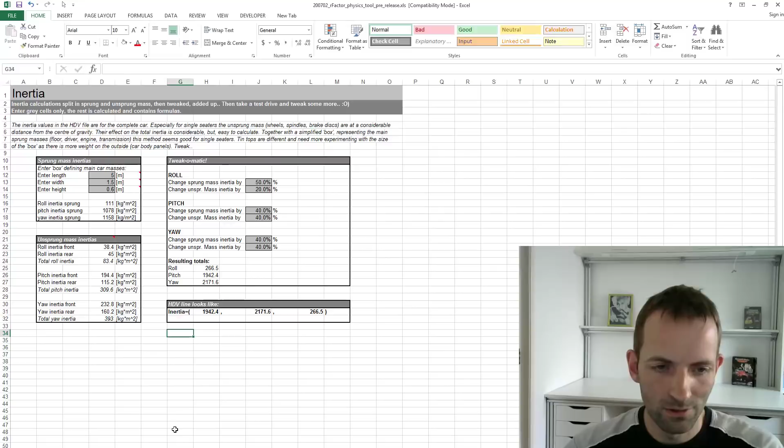Same for the springs and the dampers. There's lots of numbers here, things I could enter, the spring stiffness and lots of tweaks and stuff. It calculates a lot of stuff. I can adjust a lot of stuff, like the adjustability in the car setup menu in the game, how many steps you have to adjust something. And then at the end, these numbers, they come out, which are again part of this physics file.

This is not much. There is some tire curve stuff here, but it's all very, very limited and not yet doing a lot. So this was my first, always being clever, my first spreadsheet that I made, more or less. And it sort of got the ball rolling because I felt at this point that this was the right track to be on in order to make more realistic physics, while not just chasing like a needle in a haystack, but actually being in control of the numbers by making the calculations in the spreadsheet and then spitting out the lines that go into the text files. Pretty clever, I thought back then, but there is more.

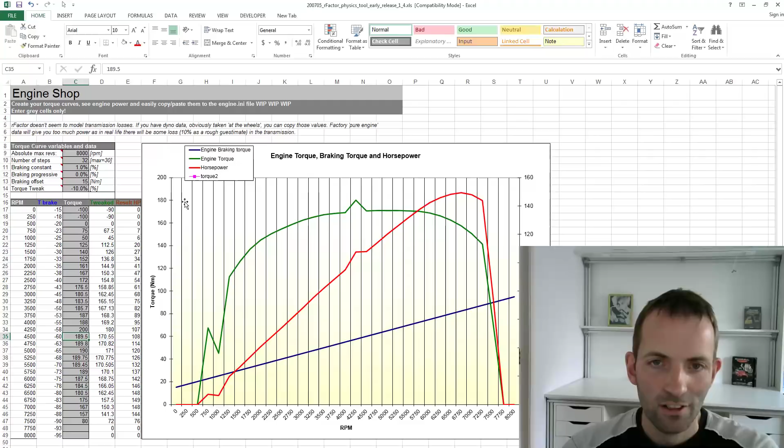Overall torque tweaking, like for drivetrain losses and stuff. And I just had to enter one torque curve. So here, you see, I'm making the curve, well, destroying it now. But see, you can make your shape here, and then at the bottom, this will be able to be copy pasted. Let's see if that works. It should work. Copy, and then paste. There's actually a bracket missing, but I didn't select enough cells. But that's how I would import this engine into the game.

So a continuation of that first spreadsheet with more and more stuff. Gearbox added. How many gears do you have? And also the speed you'd like to hit the rev limiter at. So that's a very logical way to set a gearbox, isn't it? Just specify the speed you'd like to do, the shift points basically, and it will create the gear ratios for you. Again, these lines here. Copy paste into the gearbox file and copy these into your HDV file.

And normally if you have to make a gearbox, it depends on the tire size and the revs of the engine, what sort of gearbox you need. So it's quite difficult to predict what gear ratio will result in 100 kilometers an hour top speed in first gear. So why not use a spreadsheet to just calculate it for you? And that was quite handy, and you can imagine the time it saves on making a car. So that's quite nice.

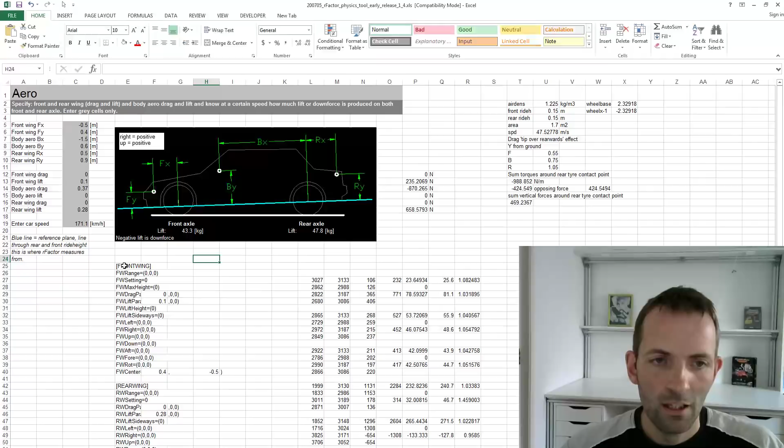Still no tires. I struggled with that. There's a bit of tire curves, but there's not a lot there. There's a bit of aero as well in this sheet, calculating some wings and stuff. So I would enter a car speed and I will get my aerodynamic forces there. And again, a whole bunch of aero parameters that go into the HDV physics file. So you can already see it's starting to expand, and it's starting to make more and more bits of the physics files. It's nice to see this after 12 years, and perhaps it's interesting to you to see how this slowly progressed from modding into the more professional stuff.

So if we continue, here we have a different color scheme, which is obviously very important. We're now somewhere in the summer of 2007. This is more of a total creator of tires. So you can make stuff here. So let's make some tires, if I remember, for a Corvette. I don't know, it's copies there, yeah, to high performance, track day, grip tweak. Well, we don't know if we have to tweak yet.

So these are all the numbers you have to enter. And then there's this magic button. And then we create a new text file and paste. There is my entire tire file. Ooh. With the numbers we entered. The road tire generator O-matic. Yes, I read the Hitchhiker's Guide to the Galaxy where everything is an O-matic.

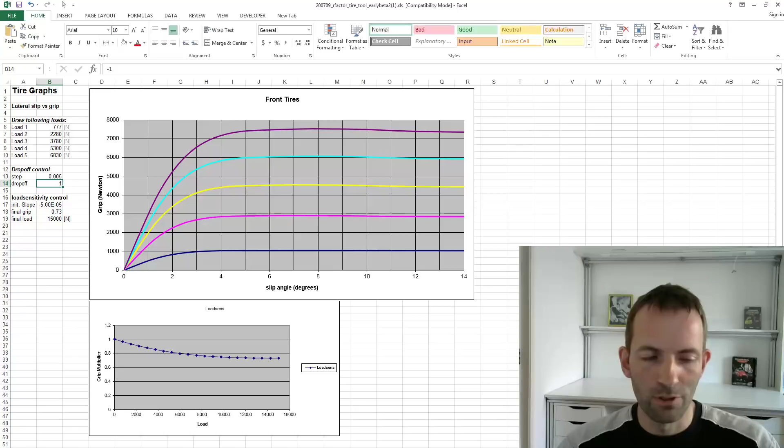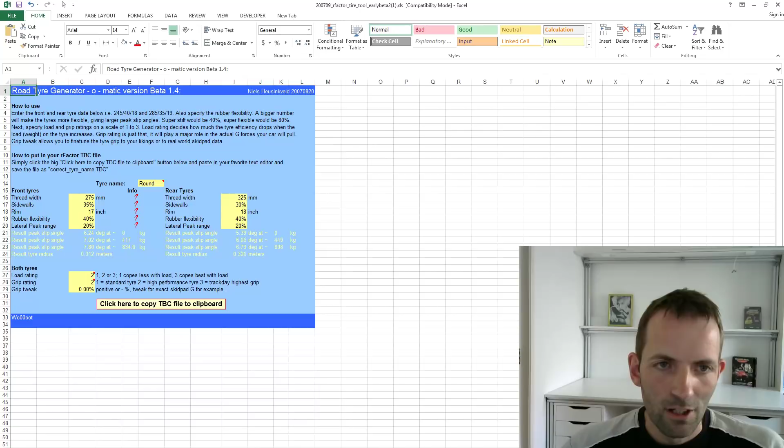So by this time it's getting a little bit more complex, and it's taking more random work and more boring work away. And I can focus more time on creating tires by changing the parameters rather than changing all those numbers. So that's another nice step up. And this was the time when we released the Corvette C6 mod for rFactor. If you're very old, you might know that.

So this is so old. This is my student apartment. 11.6 square meters back in 2007. Very cheap though. I got no debt as a student because my room was cheap. No 4K back here even. It's all very old school.

Actually a prototype H-pattern shifter. So guess how long the prototypes of that thing have been in the works. rFactor single screen. Over the shoulder cam. Potato camera. 320 by 200 I think. And this was the first result of some of these physics tools.

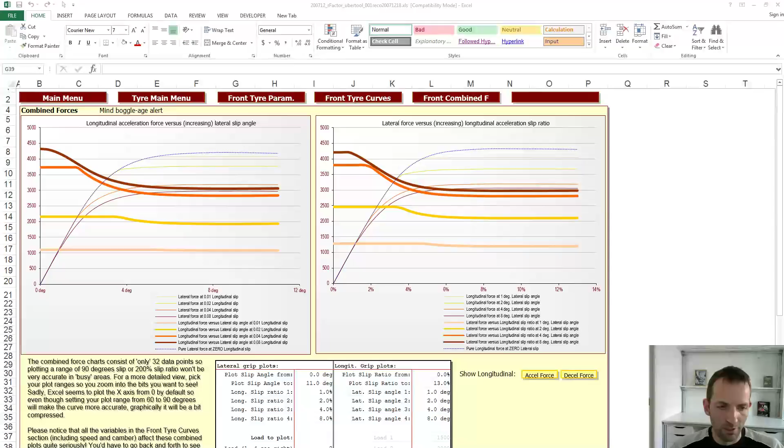Well, all these snippets that you saw here, one file created, it still was a bit scattered, right? So it would be nice, we are another few months later, to have a more complete tool. And I started working on this late 2007. Another change of color scheme. It still was the plan to go public, although I had no control over what I was doing. It was sort of getting out of control a little bit. Lots of buttons, most of which probably some work.

So here I set a lot of parameters and get some numbers, and it's gradually becoming more complicated. But it's also like, yeah, lots and lots of numbers. So this didn't happen overnight. This was a year or so worth of combining knowledge and messing about.

And for example, the tire curves are now easy to make. So I have here show curve. There are 8 curves, I believe. So curve 1 is this line there. And if you would like to make a new curve, I could just make a curve. So let's say this is a nice curve. I could save it as 5. Whoopsie. And then make a different curve.

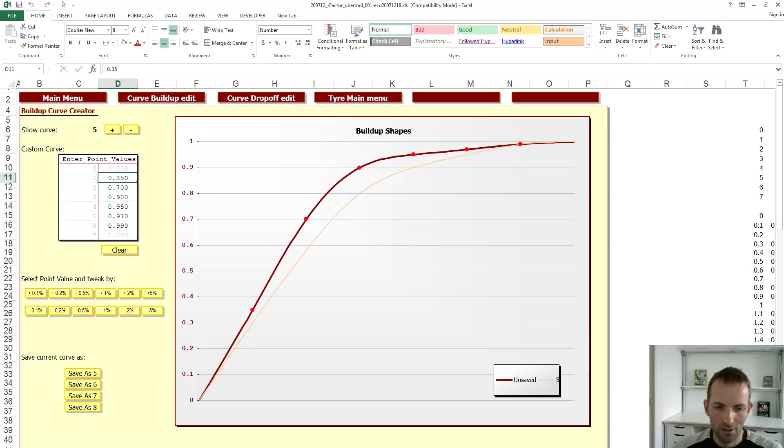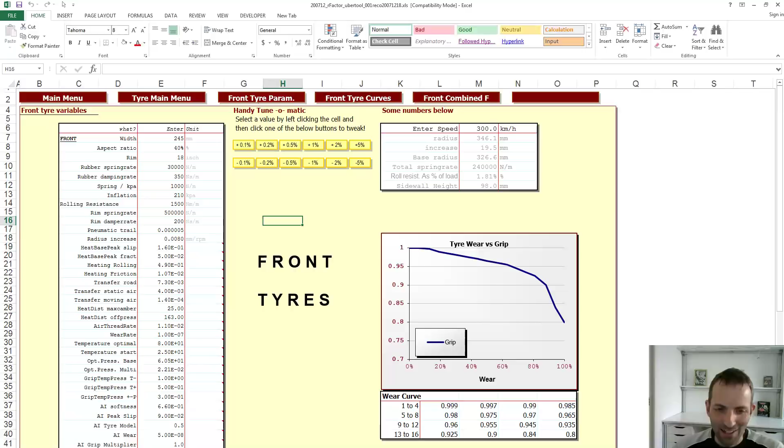This, save as 6. And now if I show curve 5 and 6, whoa, these are the ones I just created. And I can then apply these curves if I wish to, I think, here. I assume that somewhere, I haven't used this for 12 years, right? Somewhere I can set which of these curves I'd like to use in the tires. I've just got no idea where, but hey.

Oh, front tire curves, yeah. Here, front tire curve, build-up shape. 3, 4, 5. This is the one we just created. So I can change the slip curves of the tire, enter all sorts of parameters, see all sorts of plots of what's going on. So this is quite another step forward in realism and trying to get a view of the physics.

I mean, this tells you something, well, probably doesn't tell you a lot, and secretly it didn't tell me that much either, but compare that to this. This doesn't tell you anything. It's just numbers, and that's very hard to see. But this, you can, oh, right, I can see some grip increase and drop and some stretching, shrinkage, camber stuff. It being more graphical and easier to look at and see your changes, not just in numbers but in a curve shape, it's just so much easier to work with.

So this is another very big step, although it still doesn't make complete files because I think I got bored or sidetracked, probably sidetracked. Because what happened by then, after the Corvette, I got in touch with the Historx mod guys, if you remember. Lots of historic touring cars from the 60s and 70s. Awesome mod, if you ask me, sort of GT Legends, if you know that game, those cars. And I got involved with them.

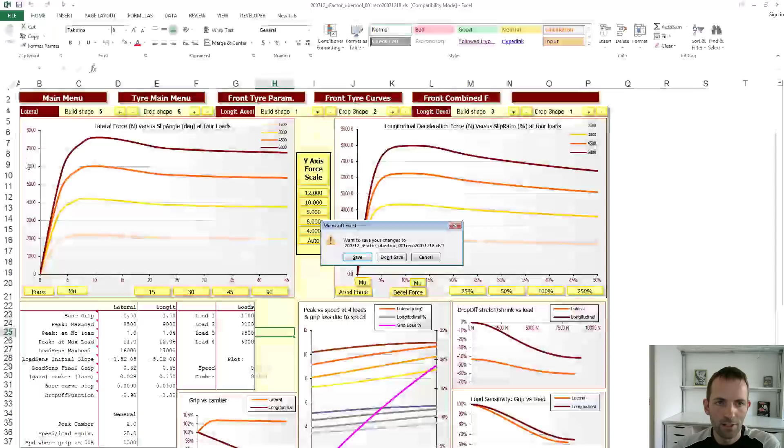So the whole thing with the physics stuff is there are so many parameters, and just changing them one by one is silly. And how about doing that for 5, 6, 7, 8, 9 cars? That's just 9 times as stupid. If you have a physics tool that makes 1 car, sure, that's nice, but then you have to make 9 cars. That's still a lot of work, and it's very hard to see what you're doing, like having that overview of what have I done to each car, what are the rules for the tire grip, stuff like that.

And with this tool, this is actually the TREX that you may have seen in some videos or earlier stuff, it makes multiple cars from the same spreadsheet. The basic theory here is that I don't create tires for each car so much as that I have rules somewhere.

Well, sort of, tire bits. It's all a bit small fonty, but heat and wear stuff is here. Tire curves, that's pretty much the same. So you can make subtle changes in tire curves, you can save them, do some checks on the curvature shape.

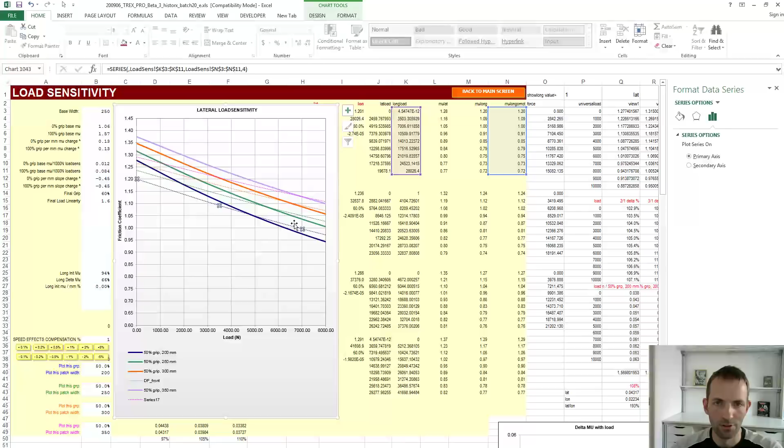Right, so here are 4 tires, 50% grip, which is just a subjective thing, and a few different ones, so a narrow tire to a very wide tire. And here you can see the grip versus load curve of the widest tire and then the narrowest tire, and the dotted lines are longitudinal. This is quite important because these rules that I've set here determine what happens when the tire deviates from its base width - it changes the grip and the load sensitivity. So rather than changing each tire individually, I have these rules that create all sorts of tires. This is quite simple, of course, but it's easy to tweak and very logical.

So in the main input, where a lot of stuff happens, I have this - the width of the tire, the contact patch width, the rolling resistance modifier, tire aspect ratio, that sort of stuff. So just the width of the tire looks at all these numbers and creates the load sensitivity. That's quite easy to do.

And I can look at some of the performance curves, like the cornering stiffness, the load sensitivity, lateral and longitudinal, how the slip angle changes, and I can do this for various cars, car 2. It doesn't really tell me what car this is. Corvette. So I can quickly look at what the properties of the tires are for each vehicle.

So this whole rule thing is very important here. Rather than doing all the parameters for each car, just set up some rules that look at a small number of parameters and then derive all the other parameters from it. That's quite important.

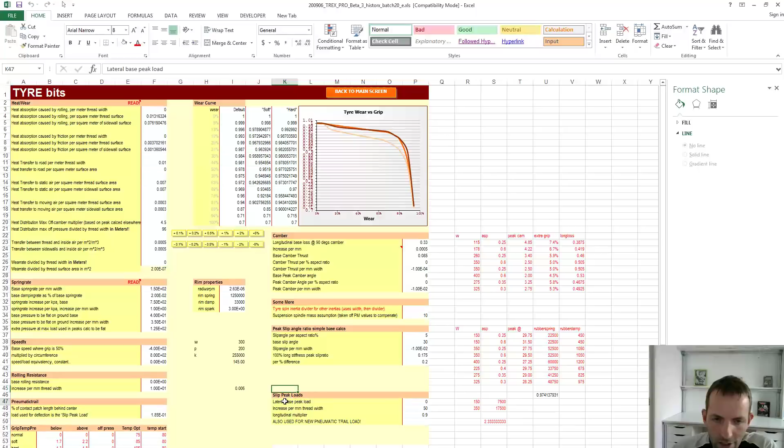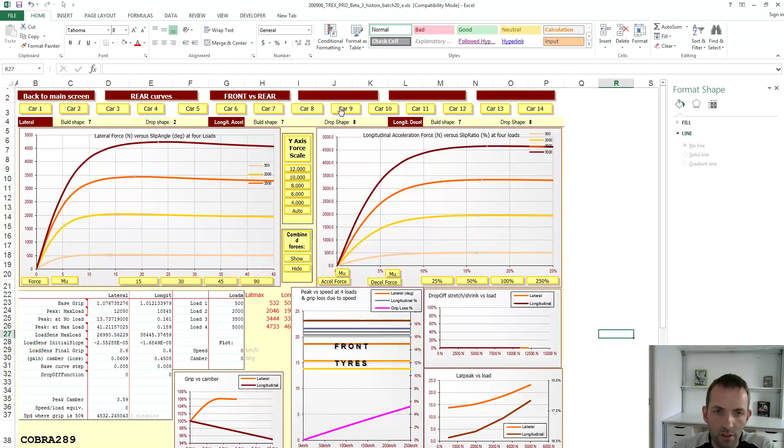So this is the Porsche 911S, and I can look at a different car. It's the Cobra 289, and then it has different tire curves. The Ferrari, whatever it is, the Healey, Austin, the Alpine, great car. So multiple cars in one sheet.

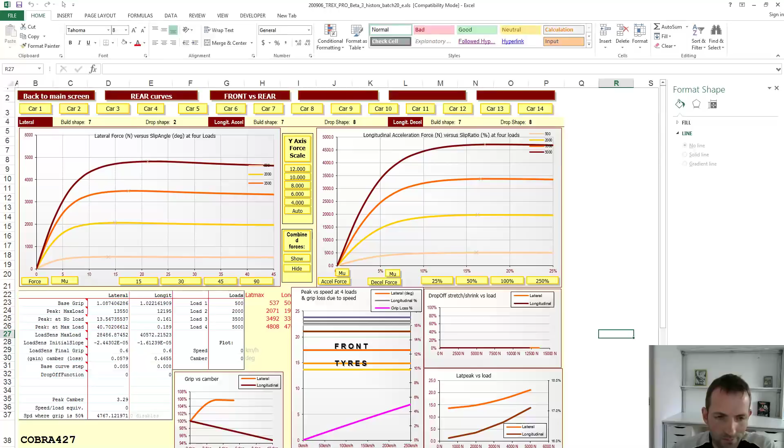Very nice, and it does add up to quite a lot of numbers. This is quite complicated in the sense that there's this many cars and main car bits, well, all the numbers - center of gravity, heights, dimensions, bug compensation. There was a bug in rFactor regarding inertias. Collision feelers, under tray, tire stuff, some calculations done on it.

So this is what it would look like if you change the grip parameter. You have the same tire width, but you change it between 0% all the way up to 100% grip, and you see how the load sensitivity changes, all from logic that I've applied here. Not only does this work, it can also save all the files with one click, which is neat to say the least.

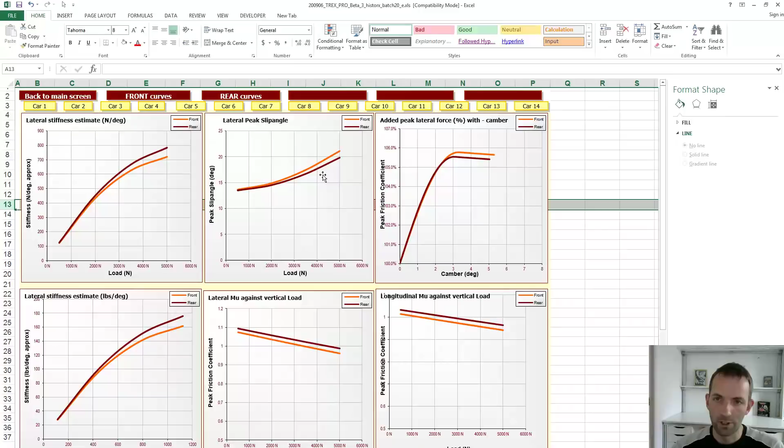There's a lot more actually here, if you keep scrolling down with the tires, the different curves we used. You could see we made some different shapes of curve, and I can set all those curves here, go to various sections, create my own drop-off curves, front curves, rear curves, front versus rear, important, main screen. You see that it navigates quite smoothly.

More variables, suspension, calculating the spring, the ride frequency. You enter the ride frequency and it will calculate the spring rate for you, and create dampers based on the critical damping. So there's a lot of stuff being automated, because how do I know what sort of dampers I would need for a certain car? It depends on the weight of the car, the stiffness of the springs, and by using a percentage of critical damping it's quite consistent. I just enter the percentage and it comes up with a damper that's 5,000 Newton per meter per second or something.

Something about the travel, bump travel, the alignment, aerodynamics, some simple aero, some calculations for the aero. And here's something I didn't quite understand that well at the time, how the ride height changes with the downforce. I don't think I understood it too well back then, and I certainly don't do that anymore now.

More aero, brakes, based on the g-force. That's quite nice, because I know reasonably well what the g-force will be that I want to pull on the brakes, but I don't know how much torque each brake disc will have to apply in order to get there. So by entering a g-force, which I know, it will calculate the required torque. That's another big time saver.

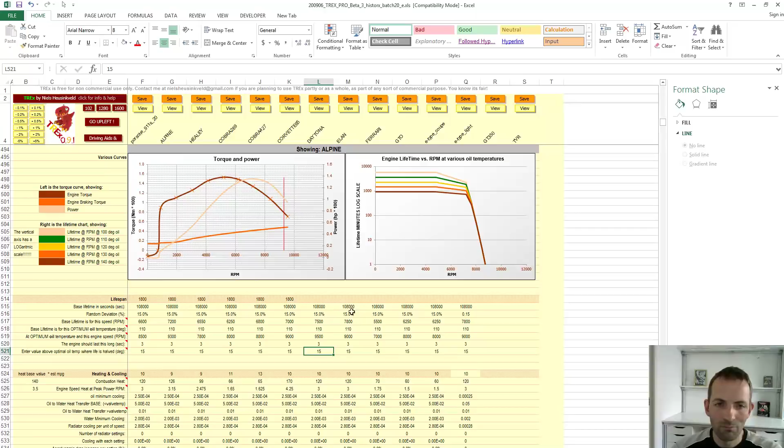Change the engine of all cars. The engine braking is also a constant number, the percentage of the peak torque, so that should be fairly consistent. Something about the engine lifetime calculations here, you can see exactly what revs the lifetime of the engine is 1 second, in other words you pretty much blow it instantly. All in overview for this group of cars.

That's quite nice. Drivetrain, of course, which wheels are driven, how strong is the clutch, and it looks at the engine for the torque it has to transmit. Adjustability of the differential. Gearbox, again a few different types, which is quite nice, so I can configure the gearboxes here. I have a couple of types, some curves with the speed the car does in the gear you're in, and based on that it will sort of spread out the gears in a certain way, gear ratios if you want to enter them and have them adjustable here.

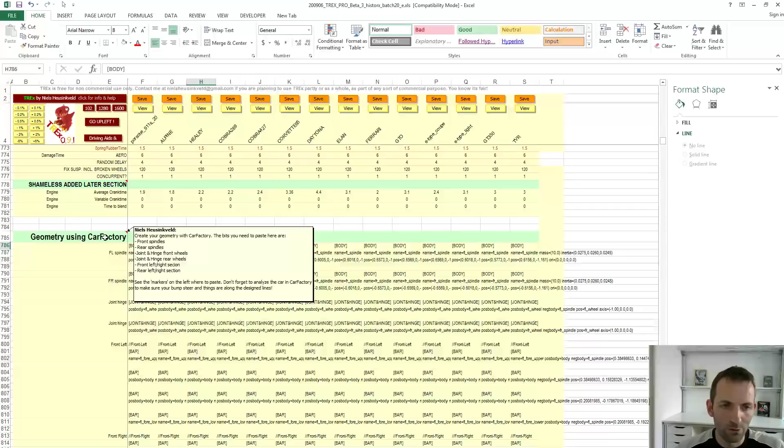AI stuff, pit menu stuff is sort of the leftover stuff, all the suspension stuff, which I used CarFactory for, already mentioned that, that's the tool made by Chris Hoyle. So everything is here, geez, quite a lot. And in the end, yada yada yada, tool rFactor XL, quite a clever, relatively clever thing.

Let's see, does it work? Let's save some of these files. I'm not sure if it's gonna work.

Yeah, okay, I just made this folder so it should exist. Now I hope - always a bit scary - can I press this button and will it work?

Yeah, so I saved the Porsche 911S and I've saved the Alpine. The date appears when I last saved it.

So this was the beginning, the very, very early beginning of Visual Basic as well. So this was all good and well. And by this time, Reiza Studios had also started more or less. So the Formula Armaroli mod that we did for rFactor and some of the first cars for Game Stock Car were made using this version of the tool.

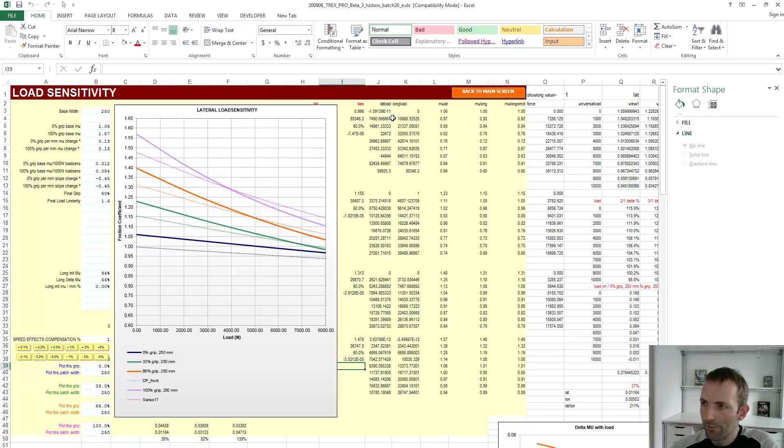Let's sidetrack a little bit now, going towards more professional stuff, because I did modding and Reiza Studios, but also some work for racing teams. And I've prepared a couple of these files where I removed all the sensitive bits, hopefully.

And this was at the time where everybody, if you're not a Formula 1 team, you used rFactor for your race simulator. So all the GP2, Formula 3 teams used rFactor, and some of them still probably do. Or Automobilista or rFactor 2, whatever it is now.

And I saw there was a market for making a tool for racing teams that would allow them to set up the car easily with numbers they knew and understood, and then launch a simulator and have a go. The thing that struck me was, with all these tools you've just seen, how complicated and how many numbers there are - there's just no way a race engineer at a GP2 team has the time, because by this time we're a year or two in, to understand all this stuff, even if he could, which he probably could.

But you cannot afford to spend a couple of years full-time working on the simulator because, unlike Formula 1 teams, all the Formula 3 GP2 teams have no money. They have money, but it's not like, oh yeah, let's hire some extra guys for a simulator. That's very rare. So I figured let's make a tool where these teams can use their car more or less in the simulator.

So what would happen? I would create the base car for them - in this case it was for a GP2 team. They give me all the data, I sign all the NDAs and stuff, and everything you see here is fictional. I've changed all the numbers, this has nothing to do with the real thing. This was also 2010, so a very old GP2 car. They gave me all the data with which I created sort of a base car, and then I gave them this tool, which allowed them to set up the car in the way they were used to.

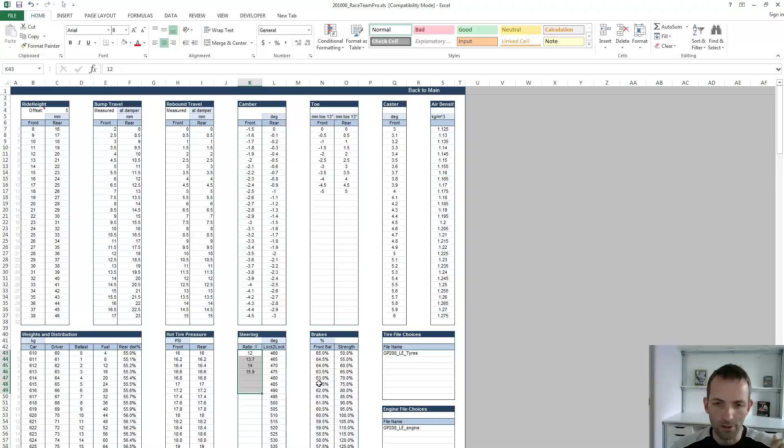So lots of stuff they can select for the travel and the weights and steering ratios, everything like that is adjustable here. There's a thing with rolling radius, complicated ways to make it more realistic. Aero as well, very important on racing cars, of course. And here I would have all the data from the wind tunnel, from Dallara in most cases if it was a single seater. Again, this is not a Dallara aero map, I randomized it.

So this would be the place where you would enter the actual Dallara or whatever your manufacturer was, all the tables of rear ride height, front ride height, total downforce, aero balance and drag. This would come straight from the car manual or a spreadsheet that you get from the manufacturer. You would put that in here, and there would be space to have lots of them, like a low, mid and high downforce. And then here at the aero tab, there are some things you can do.

Apply certain, I don't know, wing settings, 40, 60, and you see things change, drag. And these wing settings and the drag settings will change the aero parameters that will be saved to the physics files later. And here you can compare it. So this is one of those maps from the real data. This isn't, like I've been repeating myself many times, just random data here. So here you would compare that.

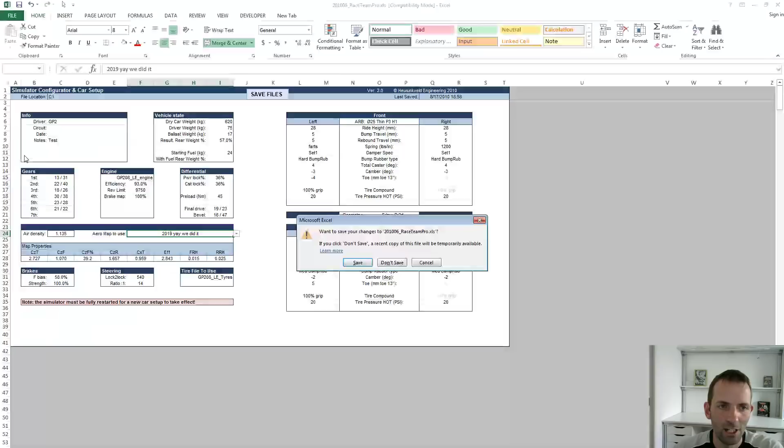This is all a bit complicated, don't you think? So another thing I saw were not so much race teams, but sim centers where they wanted to do some driver training, but not necessarily wanted this level of detail. So yeah, you want a good model that you can play with, but not so complicated. And that's when in 2011, we just left 2010 behind, I made some standard models. These were barely sold because, well, I'm much better at making stuff than selling it.

Where they could change the setup in a very simple way and tick box some stuff. And I would sell generic models for GT cars, single seaters, stuff like that. So if you had a generic driver training simulator and you didn't really care if the front anti-roll bar was exactly the same as the real car, you just want a nice car, good base handling with some adjustability, you could change some things here, like understeer everything, the brake bias to the front, high downforce, okay.

Save this car setup, slot number 3, enter a name, understeer. So now we've just adjusted these sliders, saved it, and then I can select a setup FIA GT3, it will apply it, understeer, it will apply it, and start simulator. It won't work now, but it would even launch your sim.

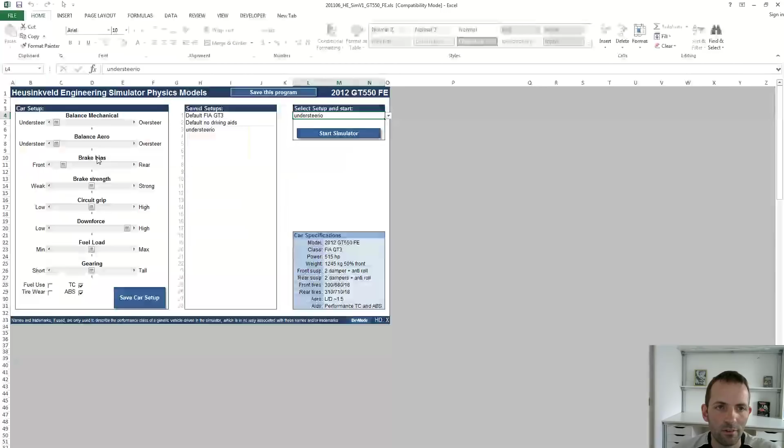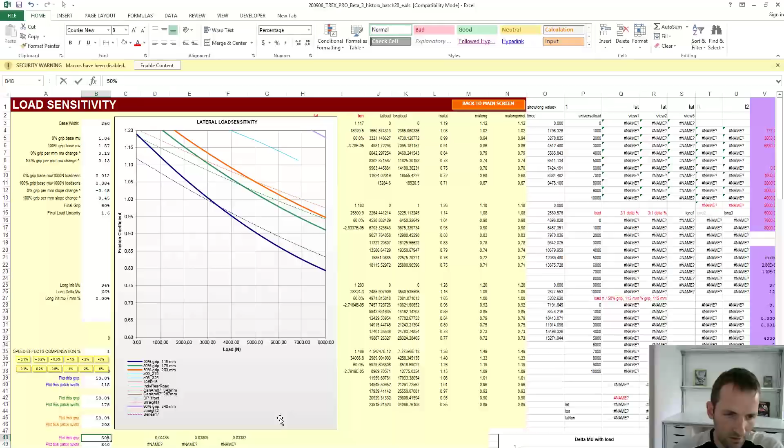If I can go back to this for a second, because now I'm intrigued again. Just imagine the power you have when you tweak from the spreadsheet. So that BMW, is it here? It's not even here, that's another batch of cars, but you find your car here, find its column, change it, save it. Or what if overall the tires are too grippy? All right, so let's, hang on, I got this.

So here are some tires, let's say the wide car tires and the narrow tires, they're all too grippy. So I think, well, let's lower it a bit. And then all tires will get a bit less grip, logically based on their dimensions. What if I think these downsloping lines are a bit too steep? Well, let's change it a bit. See how that works?

So it's so easy to make tweaks globally to all the cars and stay completely on top of them. And if there's feedback from the beta testers, they say the cars have too much this or too much that, I can quite easily change it for every one of them. So yeah, this was such a nice tool to work with back in the day. Only so detailed, but still very nice.

You might think that you need more and more detail, more and more complexity, but there is only so much that fits into this. And I'm sure there are more clever physics guys out there, but there is just a limit to the stuff you can comprehend and control at the same time. So tools that simplify the workload might seem simple, but the end results could be way better because it's a system you understand and have control over, rather than more complicated physics, more files, more numbers that you just cannot comprehend completely, let alone have an overview of.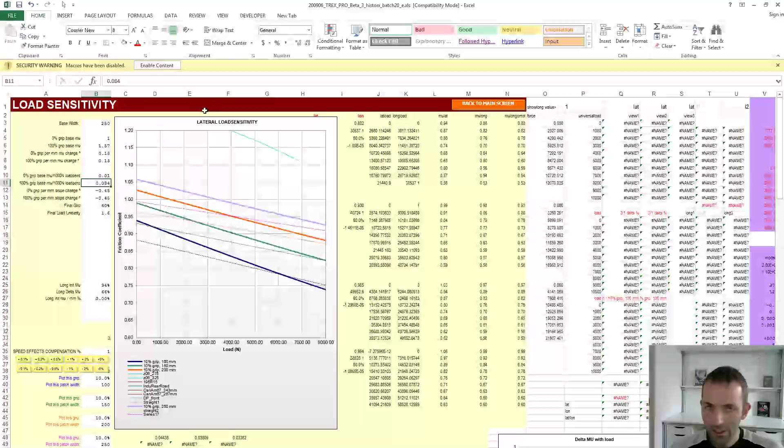Anyway, so we had lots of tools now, and then the pro stuff dried out a little bit because I didn't care too much for actually supporting and selling this; making it was what I like to do most. But I still figured there is more to be done in the professional or more high detail stuff. And this tool started in 2012, I suppose.

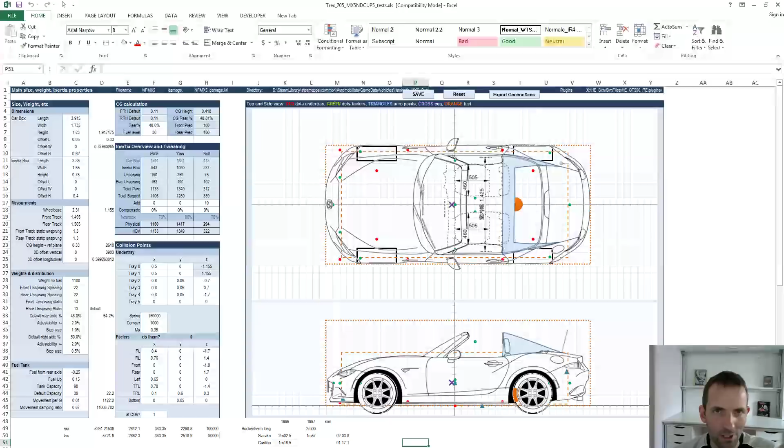And it's the one that I'm using these days for Automobilista, which is very specific again. So we went from multiple cars in one spreadsheet down to one car in a spreadsheet, but at a far greater level of detail, which has benefits and drawbacks, as I'll come to in a bit. So this has been updated over the years, so I can now add the turbo model that we have. I can add the throttle torque model stuff that we did.

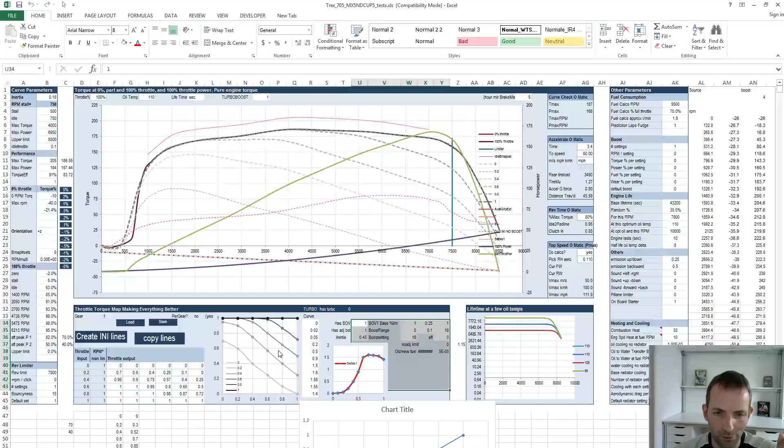There's a lot more going on, and it's also a lot less incorrect, hopefully. It has suspension geometry. It has quite detailed aero maps and curves and stuff. Probably the most important thing that's going on here though is actual code. So I showed you some simple macros that I use to navigate to certain parts of the spreadsheet. Well, it still happens here, but here, for example, the aero calculations.

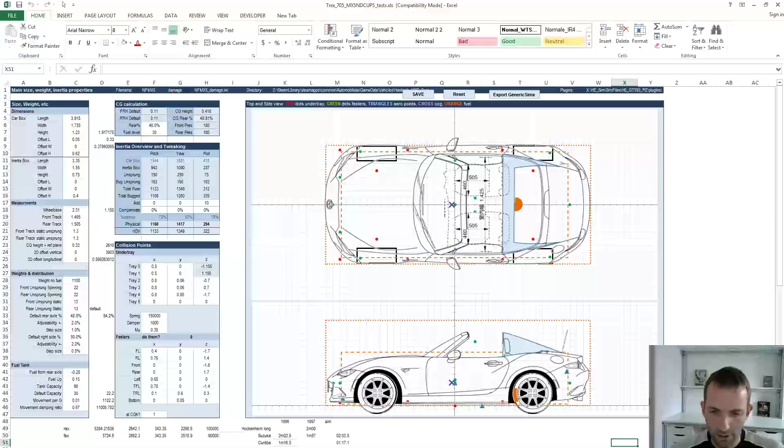At all these ride heights, all the aerodynamic forces are calculated, and these are all the numbers that decide what the aero stuff will be. Those calculations are no longer done like here in different bits. There is still stuff here, but most of it is now done in code.

So, this is what I've learned over the years, to do actual programming in Visual Basic, which is so much easier and so much more convenient than doing it in the spreadsheet itself. You can name stuff far easier and do calculations in small steps. It's just so nice. So here it looks at all the numbers, where they are in the spreadsheet, and then it does calculations, all the lift, downforce, drag,

all that stuff. So there's a lot more code going on, and that's something I've really learned to do a little bit, and it really helps a lot. So there's just a lot more, I don't even know, most are empty. Still a lot of chart stuff, but there's a lot of code as well. Yeah, some more code. If then else, spring deflection, helper springs, bump rubbers. So this is all for the ride height calculations from the downforce.

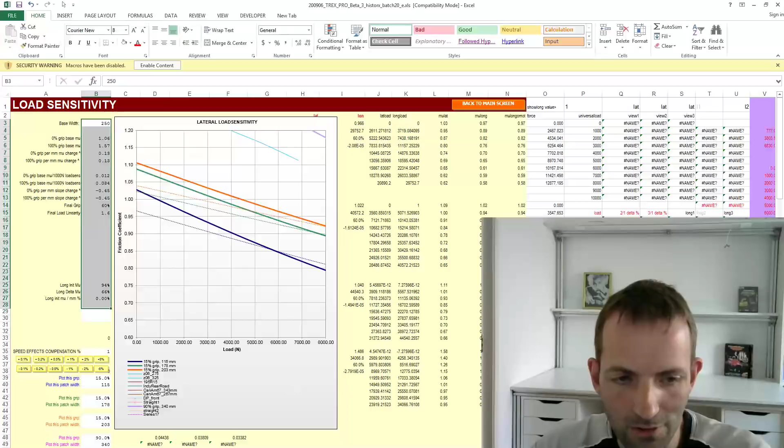And that's something, well, you've read that Automobilista 2 is announced. That's great. And I'm not too involved with that because of a number of things, just really busy with the hardware stuff. And I have to rewrite everything. I want to go back to that spreadsheet that does multiple cars at the same time. I think that's the only way to do a new sim where you have all the cars in one spreadsheet with complicated but clever rules that calculate the tire grip, the suspension stuff, everything. Way more complicated than this. But you remain in control of all the content in one sort of overview.

And if you make changes over the years, or you learn more over the years, you update the spreadsheet and you can save all the files with all the latest developments. So you don't get this fragmentation of, oh, this is a car from 2011. Oh yeah, 2 years later I understood suspensions better, so this car is better because the suspension is better. If you had a system like this, but then updated to my modern standards, you would not have that. You have far more consistency, and that's a bit ironic

because of course Automobilista is quite praised for being relatively consistent in its physics quality, which is because Renato and me have worked very hard on it for 8 years. So it's not like it's terrible, but I'm never happy with the way physics are. It can always be improved. And looking back, since we had the games so long, and since the modern games tend to, I mean, look at iRacing, it's 10 years old.

rFactor 2 is 6 years, 7 years old by now. Games are out for a long time, and if you sign off on the individual physics files and then improve the game, it's very hard to go back and improve the old stuff. And having it all in one spreadsheet is the way forward. But

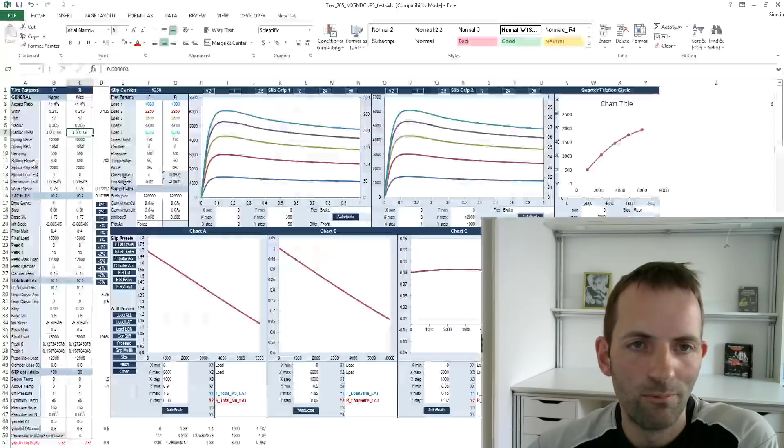So I am actually working on stuff which you may or may not ever even see, but just to show you that in the meantime I have done stuff. Why am I even showing this? It's all a bit of a mess, but hey.

So here, for example, is an engine creator that I've recently made. I started back in January, February, to see if I could break down engine, tires, suspension, that sort of stuff into chunks, and come up with a way to relatively easily make an engine that is adjustable without having to deal with all the parameters, because the engine stuff in Automobilista is quite complicated now. There are so many numbers.

So I broke it down. I just went for a coding session, and this is now really something. Might as well give you a little bit.

So I've programmed how to make an engine torque curve with certain shapes and drop-offs, and even have a bit of noise in the torque curve. There's turbo modeling programmed a little bit, and throttle mapping, torque mapping. Is there anything else?

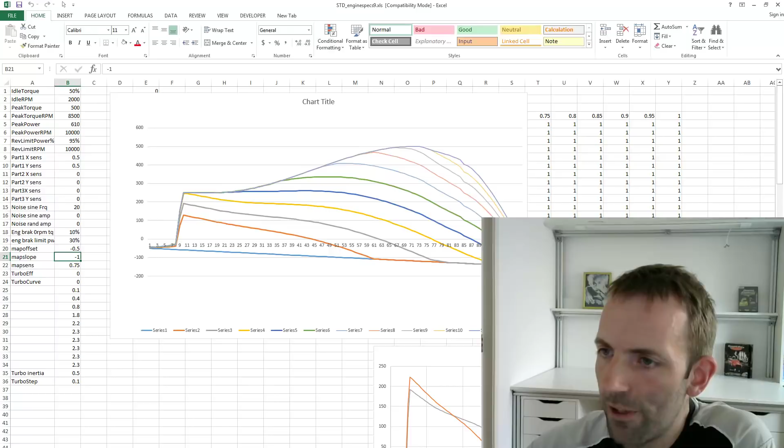Sorry, this is going to take a while. Well, if you're still here, you're nuts anyway. You might as well wait around for a little bit more.

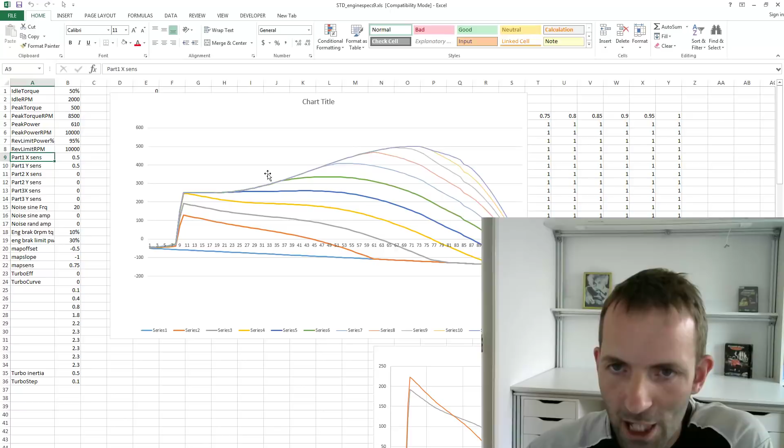Yeah, so what is created here? I just changed some numbers, and you saw it change shape a little bit. It's not only the torque curve, but also all these numbers here. There's a lot of them, and they're all created from just a couple of numbers that I enter here. So that's quite interesting. I'm working on stuff, and I have a lot more done actually.

Since we are giving you a peek now anyway, which is not really structured, but... let's see.

No, Niels, that's not it. People are falling asleep. Yeah, I know.

Ah, look, now this is nicer. So you saw all those tire curves that I made in the previous spreadsheets. This is actually running off the same code that actually runs rFactor and Automobilista. So this is just a copy of the code, of the source code. That's why I cannot show you the code.

But for the first time, yeah, I know we've been using this engine since 2007, but for the first time I can actually plot combined slip, so you have lateral and longitudinal wheel slip at the same time, all sorts of conditions, friction ellipse, that sort of stuff, for the first time ever.

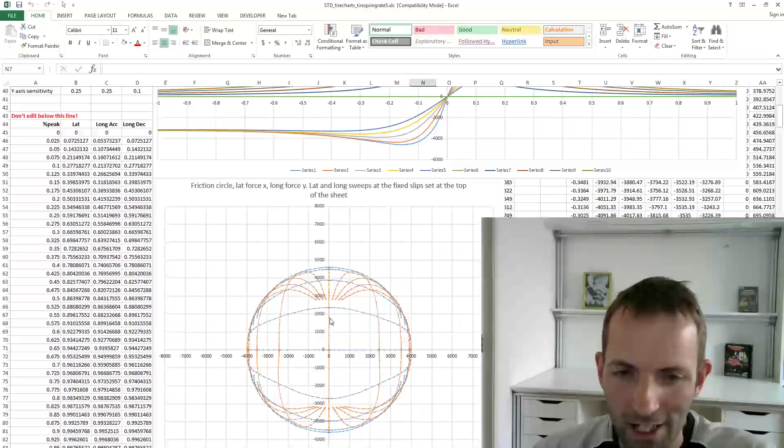And this is quite insightful because it showed me a couple of things that I didn't know, and hence showed me ways to make the tires even better and more realistic.

So the code here is significant, and I've already spent a few months on this, so I'm slowly understanding the engine at an even deeper level, and then making tools that simplify the creation of tires, engines, and that sort of stuff. I will continue with this because it's fun, it's my hobby.

And who knows, perhaps by the end of the year or something, I'll have my mega tool that creates Automobilista quality cars in a matter of minutes. And whether it's 1, 20, or 50 cars, it doesn't matter, the tool should be able to handle as many cars as you need. So yeah, that's my mad scientist maniac project I'm working on now.

But I hope that was sort of an interesting overview - oh yeah, my face is big. Well, you can still see something. An overview of what I've done over the last 12 or so years with spreadsheets. Wow.

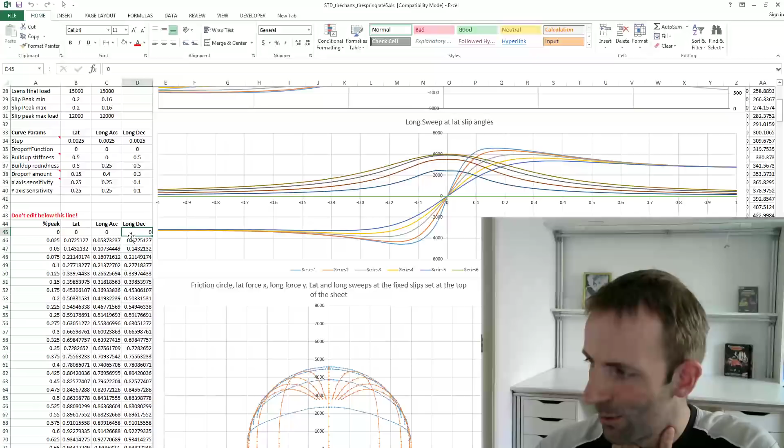Just when you thought Niels couldn't get more boring, he uploads an hour-long or so video of... jeez.